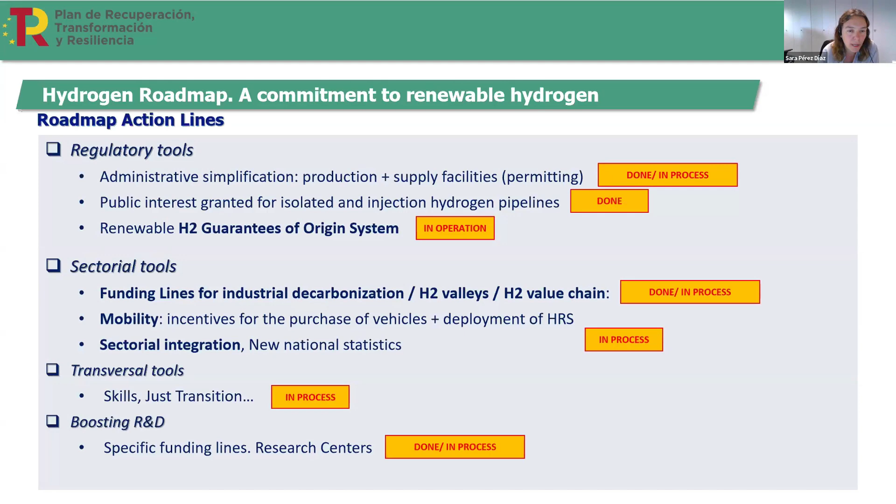In the next slide, I would like to give you some figures on the funding programs that we are managing at IDAE. All the funding instruments deployed by Spain for the hydrogen sector are under the umbrella of the Spanish Recovery, Transformation and Resilience Plan. Component 9 of this plan addresses the hydrogen sector, aiming to position Spain as a technological reference in the production and use of renewable hydrogen.

It is foreseen a budget of 1,555 million euros, structured along 4 lines of action, including line 1, innovative value chain projects, focused on strengthening innovation and research and increasing production capacity. At the first round, 250 million euros were granted in 2022 and 2023. And now in 2024, we are resolving a new call with a budget of 66.6 million euros.

Line 2, hydrogen valleys, to support big projects with hydrogen production and consumption. The idea is to create a hydrogen ecosystem where other projects or related activities could be developed around these big supported projects. Line 3, pioneer projects, focused on smaller projects up to 50 megawatts of electrolyzers, aiming to promote both production and consumption of renewable hydrogen in nearby locations. There was a first call in 2022 and a second call in 2023, with 300 million euros awarded in total.

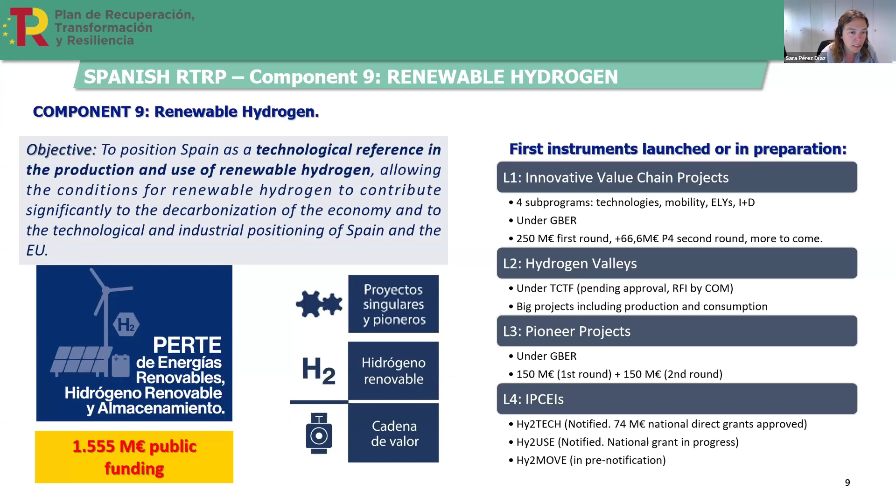So, next slide please. As I explained before, 300 million euros have already been allocated in this first program, Singular and Pioneering projects. The eligible actions are production, with the installation of electrolyzers but also with dedicated renewable energy plants; distribution, storage, conditioning and dispensing of renewable hydrogen, including hydrogen refueling stations; and consumption that, in line with the hydrogen roadmap, includes industrial uses, heavy mobility, and innovative stationary applications — what we call fuel cell applications, for example, for the decarbonization of ports or airports. So all these actions are eligible under this program.

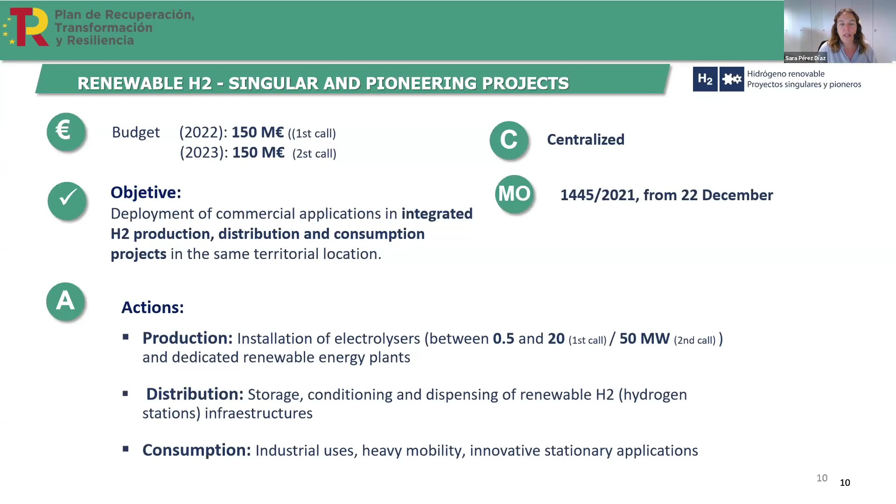In the next slide, you can see the renewable hydrogen value chain program. It had a budget of 250 million euros, and the objective is boosting the know-how and productive capacity through the development of technological advances in the hydrogen value chain. There are 4 programs included.

First, capabilities and technological advances in testing and manufacturing lines. Second, design, demonstration, and validation of new hydrogen-powered vehicles. The third line is large-scale electrolyzer demonstrators. And the fourth, basic and fundamental research challenges, innovative pilot projects, and training.

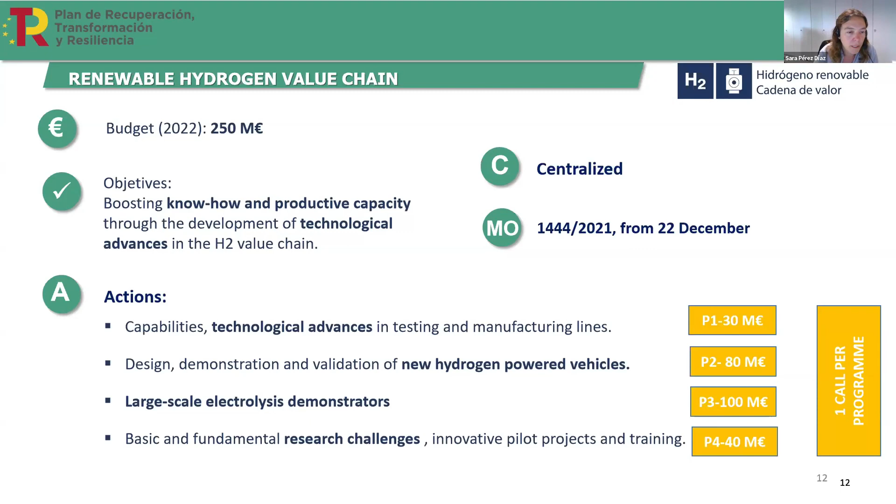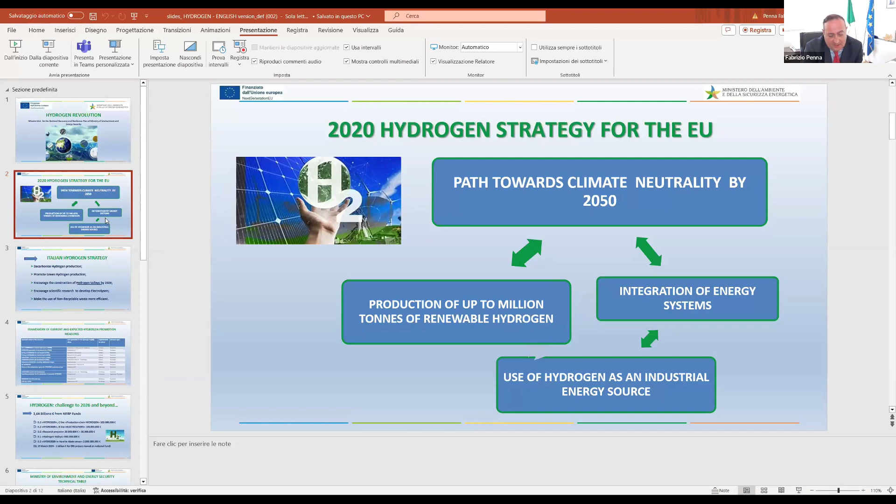Across the world, our life changes and individuals' opportunities to improve their quality of life are being threatened by conflicts and climate change. Supporting the development of technologies and the perception that they can mitigate or solve the current problems must become a top priority. Hydrogen is one such technology.

Recently, the EU has embarked on the important mission to decarbonize its economy and develop a sustainable emission-free model of society. With the Green Deal started after the COVID-19 pandemic and strengthened after Russia's invasion of Ukraine, the European Union has produced the tools that can shape a climate-friendly future. One of these tools is the National Recovery and Resilience Plan, with the addition of the REPowerEU chapter.

In this context, it's important to underline that the EU is not alone. In the world, many countries are striving to be champions of decarbonization. While their adopted timelines are longer than ours, we should not doubt their determination to achieve their goals. We need to bear in mind that global competition, and even our own European ambition to achieve climate neutrality by 2050, is closer than we think. There is only one generation to go before 2050.

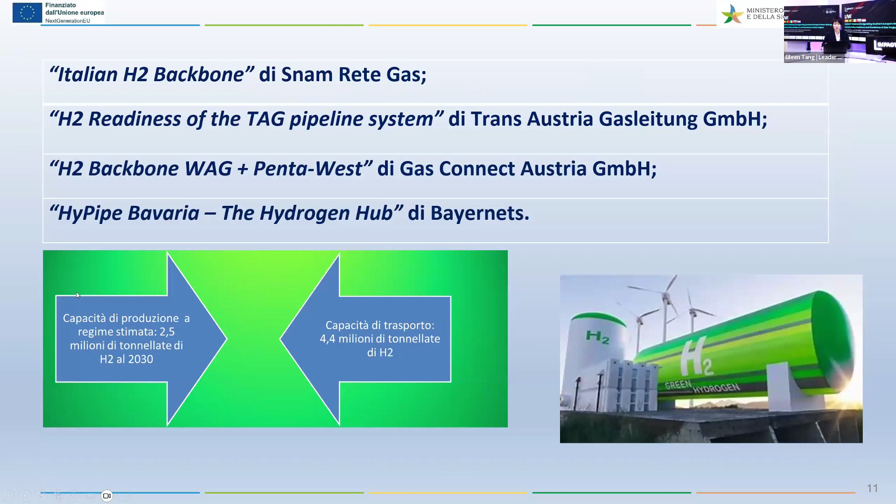And here we've got some questions from our audience. The first one is, what advantages does Italy possess in terms of green hydrogen policies or market in comparison to other countries in Southern Europe?

Thank you. As we say today, Italy strongly believes in the development of green hydrogen. Now green hydrogen is very expensive. We have different lines of investment. We have institutions open to companies from all companies of the world that want to invest in Italy. We have a plan to develop applied research.

And last, do you know that geographically we are a hub on the Mediterranean Sea, and we are, and we want to be, a logistical gateway to the African continent.

I think with a well-structured plan, like you stated, it's exciting to anticipate what's going to happen next in this market. Thank you so much again for joining us.

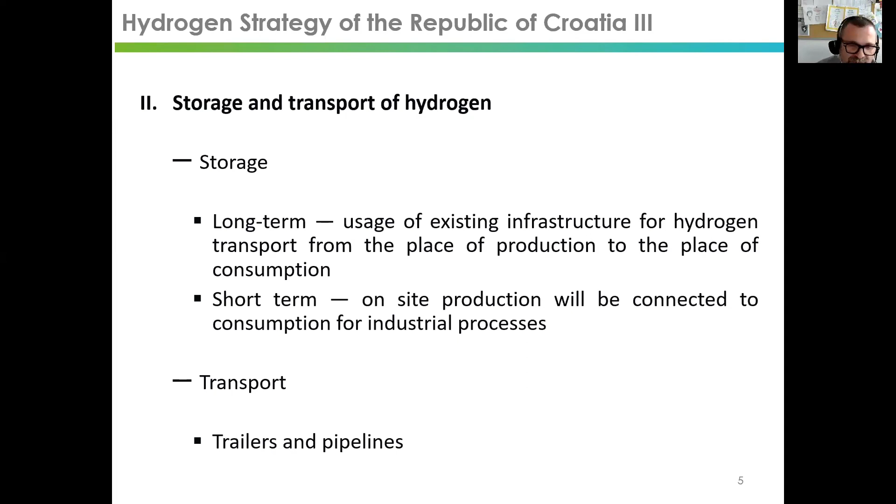And that hydrogen will be transported by trailers or by the pipelines that will be built in Croatia. Regarding the use of hydrogen, we also have potential projects.

The most matured project is probably in the transport sector, and we want to see hydrogen vehicles, especially heavy-duty vehicles, and especially city transport vehicles propelled by hydrogen. But we also have potential to use hydrogen in industrial processes, especially in hard-to-abate industries like glass and brick industry, but also as a raw material in the petrochemical industry and refineries. And we see hydrogen as a potential energy storage and a tool for electricity system stabilization.

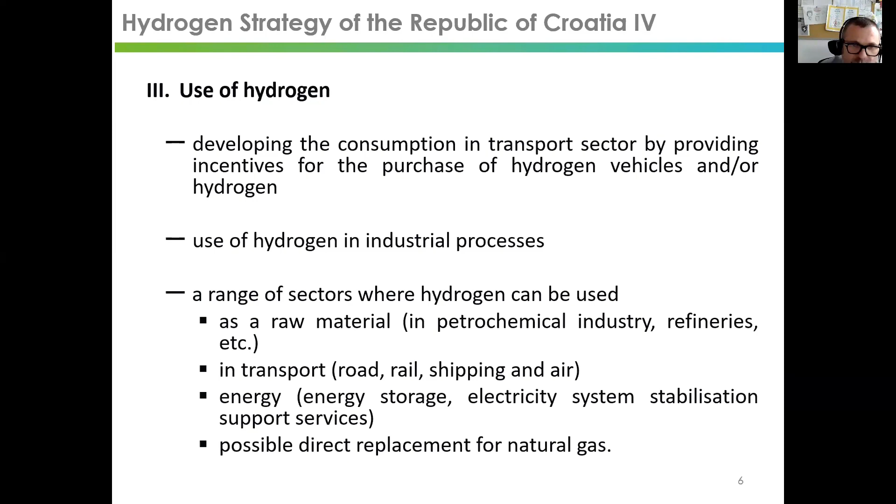As I said, the transport sector in Croatia is mostly mature, so we have a sector with high CO2 emissions, and it's shown that in the last few years the emissions in the transport sector in Croatia are growing. So we need to do something. We see the possibility to boost hydrogen in public urban transport, and maybe potentially also in the waste sector and other activities in the urban area. It will reduce CO2 emissions, but also noise emissions, so it's a win-win situation regarding urban transport.

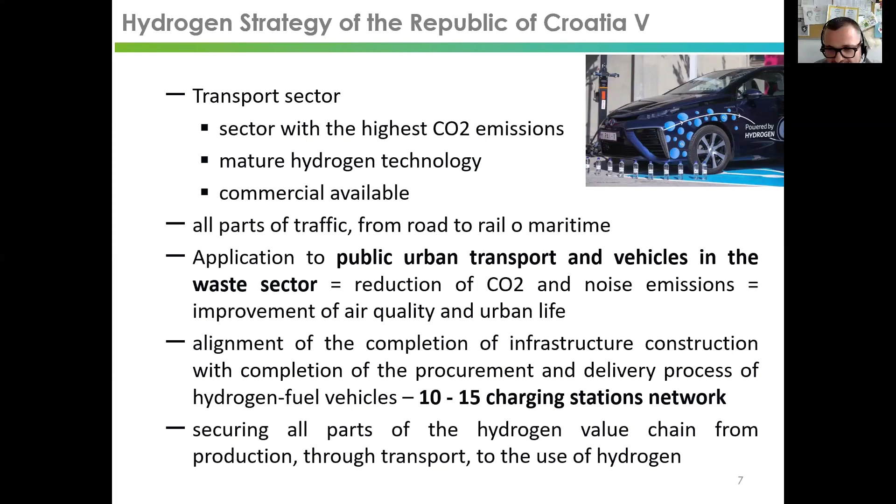To do that, we need to boost the development of infrastructure for the usage of hydrogen in the transport sector. Our goal is to have 10 to 15 hydrogen refueling stations in the network by 2026, 2028, let's say - 10 will be by 2026. We also need to secure all other parts of the hydrogen value chain: production, distribution, same as these refueling stations.

Another topic extremely important in Croatia, highlighted in the hydrogen strategy, is education, research and development. We need to develop new educational programs. We also need to develop the concept of lifelong learning for the usage of hydrogen, but we also need to raise awareness regarding the implementation of new hydrogen technologies in all sectors. We also want to connect innovative products and services to ensure commercialization and wider deployment of hydrogen technologies. We see potential in Croatian universities to boost this educational program, to boost lifelong learning, but also to boost research activities and connection with the Croatian economy.

One important project to highlight is the North Adriatic Hydrogen Valley. We put in the Croatian hydrogen strategy the importance of regional cooperation, and this is a good example of that, because North Adriatic Hydrogen Valley is a project that involves Slovenia, Croatia, and the Italian Autonomous Region Friuli Venezia Giulia. It's a transnational project dedicated to the development of hydrogen economies in Slovenia, Croatia, and Friuli Venezia Giulia. It will also coordinate international activities important to boost the hydrogen economy within the EU.

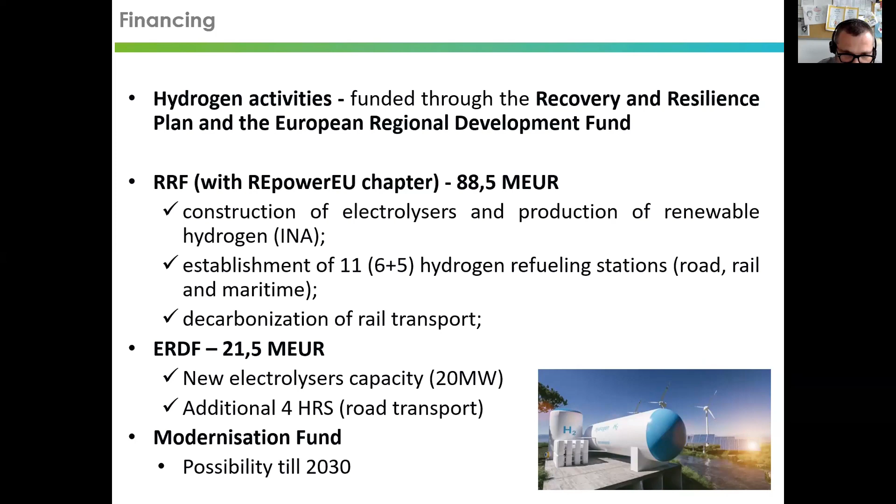We also have ERDF allocation of 21.5 million euros devoted to new electrolyzer capacities and additional four hydrogen refueling stations for road transport. We also have the possibility, using the modernization fund, to finance some projects until 2030. So to conclude, Croatia is fully committed to the green transition, and hydrogen will play an important role in reducing CO2 emissions. We also think we need to boost research, development, and innovation across the hydrogen value chain to prove hydrogen will be an important energy carrier that could be produced and used in the EU.

Thank you so much for sharing Croatia's journey. Now let's check out some questions. One of our audience asked about the definition of low carbon hydrogen. Are there any criteria for what low carbon hydrogen means? Do you differentiate it from green hydrogen? Also, regarding the transport of hydrogen you mentioned in your slides, are there any existing plans or solutions for the infrastructure required for green hydrogen distribution?

Well, the EU promotes renewable hydrogen, and that is important, and mostly in Croatia most of the hydrogen will be renewable. But as I mentioned, we have some potential still in the research and development phase, such as pyrolysis from sludge and waste, as potential low carbon hydrogen that can be used to boost the hydrogen economy.

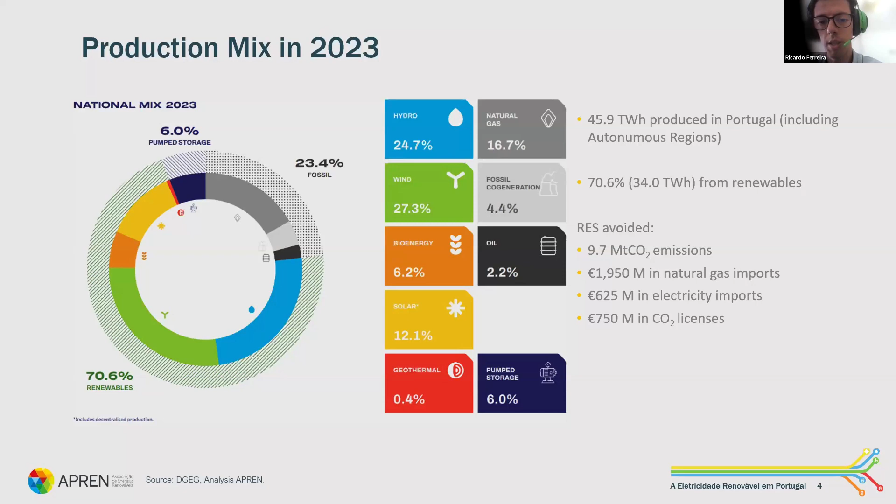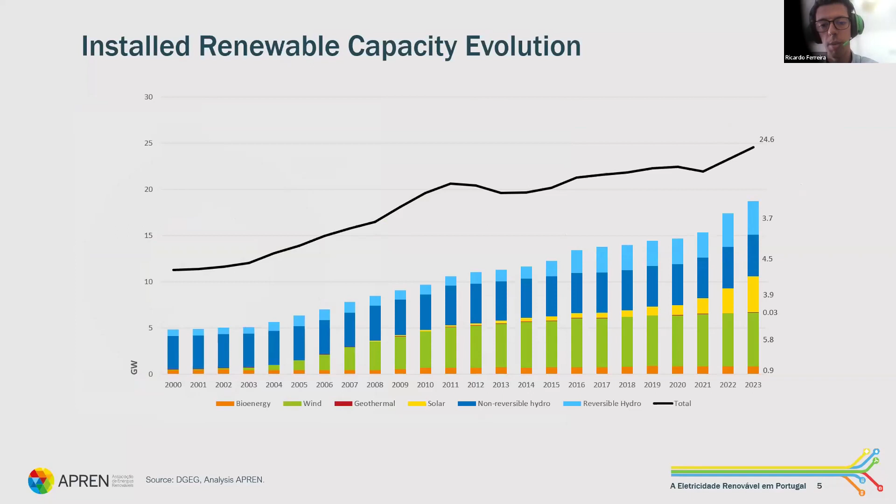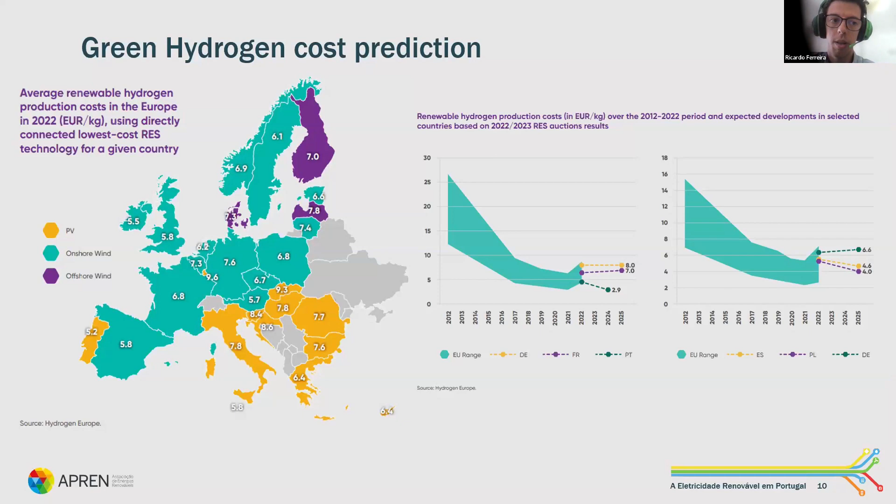The question for you is, what is the most significant opportunity for Portuguese investors to accelerate the growth of the green hydrogen economy?

With Portugal's renewable energy production potential associated with our targets and measures to accomplish them, we will have, as I presented, one of the lowest LCOH by 2030, and this is associated with low electricity prices due to the development of the sector. So Portugal has not only the resource potential, but also the ambition and the regulatory framework to accomplish the targets defined. Thank you.

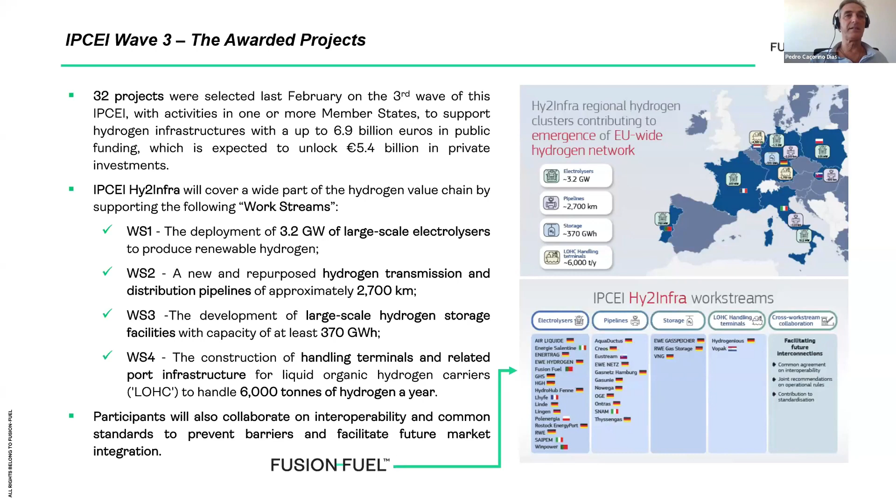Our project, developed by Fusion Fuel, will be developed in Sines. It will be called Sines Green Hydrogen Valley, and will consist of the installation of 630 megawatts of green hydrogen production. This project will represent 11.5% of the Portuguese national hydrogen strategy, which aims to install, as Ferreira was saying in the last presentation, 5.5 gigawatts by 2030. This project will be able to produce 62,000 tons of green hydrogen.

It will avoid 600,000 tons of CO2 per year, about 13 million tons of CO2 along the lifetime of the project. This avoidance considers the direct substitution of gray hydrogen produced from steam methane reforming of natural gas. The green hydrogen produced will be mainly targeted for the port of Rotterdam in the Netherlands and the decarbonization of several local industries in Portugal. 40% of all the green hydrogen produced will be converted into ammonia and exported to Rotterdam, creating a kind of pendular movement and total integration between the two.

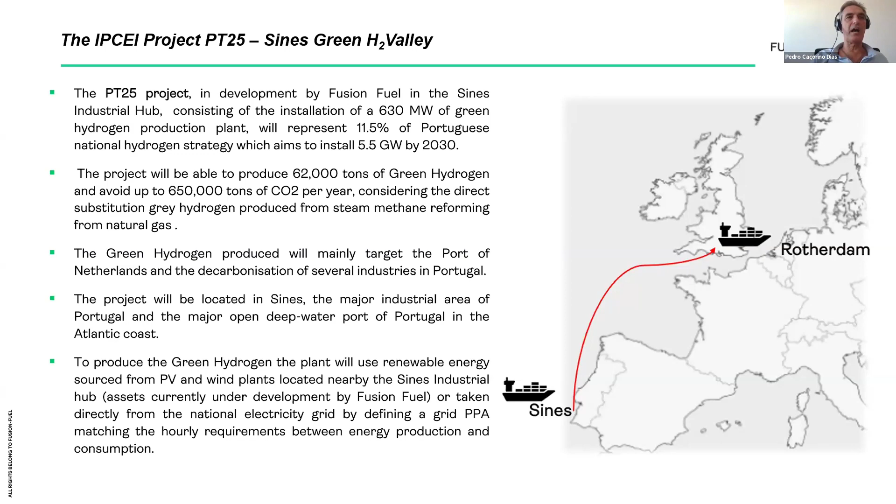It will be self-consumption according to the Portuguese legislation, and we will also request to achieve a higher load factor, the higher use in the days and hours where there is no sun or no wind, to use the grid. Because of the legislation, we need to do that to be considered green, to match the hourly requirements between energy production and energy consumption.

I don't know what you know about Fusion Fuel, it's not the most important, we're talking about the project, but Fusion Fuel is a pure play hydrogen solutions company focused on projects in Europe and North America. We went public in late 2020.

We have two manufacturing facilities in Lisbon, mainly one in Benavente, with a targeted maximum capacity of production of 500 megawatts per year, and we produce a European electrolyzer, which is kind of revolutionary, which is this one.

This container of 40 feet has 2 megawatts, but is composed of sets of these cabinets here that you see, connected in series, and each of these cabinets contains 36 of these very small PEM electrolyzers. So we can make extremely big power plant hydrogen plants, but we can make them also extremely small, so adapt exactly to the power that we have.

With this kind of flexibility and modularity, we can move our electrolyzers directly to the power and not the opposite, and we can very easily adapt to projects for self-consumption. So this project will be an opportunity not only for the IPCEI to connect the port of Sines and the port of Rotterdam, but will also be a possibility to develop and demonstrate this flexibility of this European technology produced in Portugal.

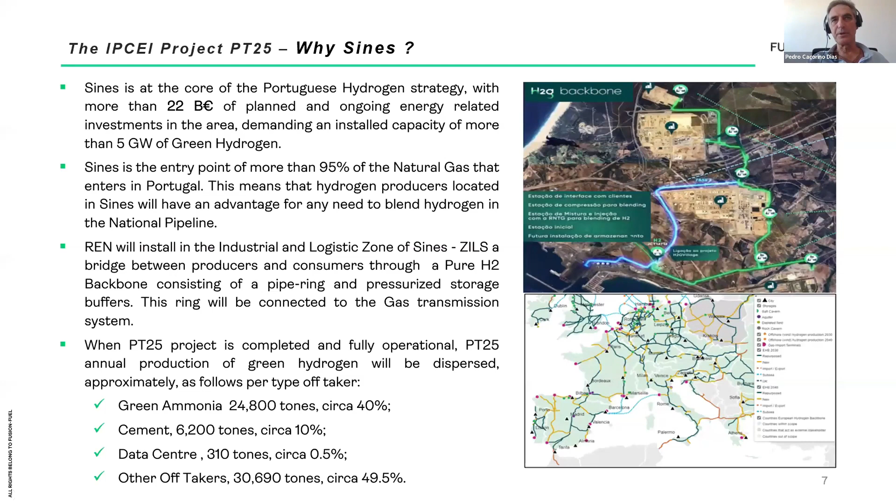0.5% for the data center that will be installed also in Sines, and for other list of takers, which is Repsol, Green Steel, and so on, Indorama—all the local companies will offtake the remaining 50%. So all the hydrogen used internally will be produced by the local producers that install themselves internally.

To finish, these IPCEI projects give extraordinary importance to what they call the project impacts and the spillover effects, a full list we have presented, but I will underline the following: decarbonization of hard-to-abate sectors, which are extremely hard to abate and extremely strong responsible for the emissions, like ammonia, cement, steel production, and backup power, which is an end use currently dominated by natural gas and diesel engines.

This project will also assist Europe in diversifying its energy sources, reducing European dependency on Russian gas, as well as US, Canada, and African gas.

Also, the installation of this capacity, which is huge, 630 megawatts of green hydrogen, is important at least for Portugal, but even for Europe. This is a strong contribution for the goal of 40 gigawatts of green hydrogen installed capacity by 2030.

And now to finalize, this IPCEI project will strongly uplift large scale production of our EVO technology that, for the reasons I've demonstrated, is extremely flexible and modular, able to be used for extremely small and extremely big installations. So it will contribute to the reinforcement of the European technology value chain and diversifying risks related to technology.

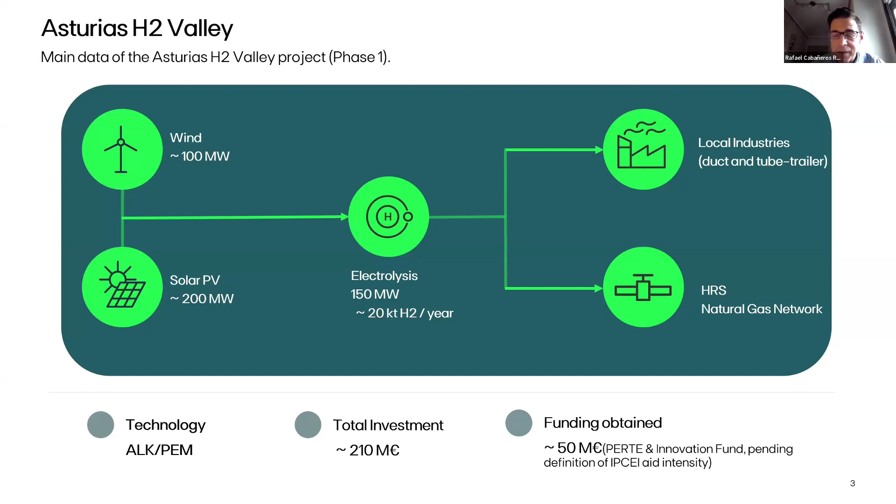This is the abstract of the different grants we have received. I've commented on the 20 megawatt project which has received 15 million euros from PERTE 1. For the second sub-phase of 30 megawatts, under PERTE cadena de valor, we have received 15 million euros. For the IPCEI, as I commented recently, we don't know what quantity we will receive. I hope this knowledge will be transmitted as soon as possible. Finally, for the innovation fund, we have received 18 million euros. This is the total for phase one of the project: 150 megawatts, 48 million euros, plus the quantity of the IPCEI grant.

The location of the Asturias Valley is near Gijón, in the north of Spain, in Asturias, and very close to a lot of industrial points, natural gas consumers and other industries with needs of decarbonization. This is near Avilés and Oviedo and similar. In fact, we have another project near Gijón, near Oviedo, the H2 project of Soto, and the idea is to join these two projects with an internal hydrogen pipe in order to get 1 gigawatt location.

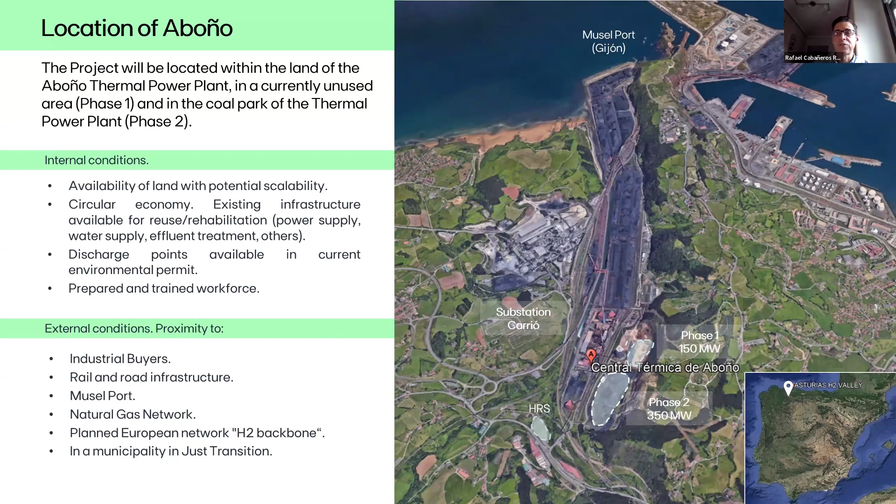With more detail, this is the area for phase one. Phase one, as I commented, has received all the grants and has passed the permitting. It is in this area at the right of the plant, in the northern part of the site, with 150 megawatts of hydrogen. This site is totally available, with no problem with soils or other contaminants. This is ready to build, with a COD expectation of 2026, the middle of 2026, depending finally on the date for the grant of trade. Phase two adds 350 megawatts, with COD expected more or less in 2030, depending on the needs of the industrial valleys in the surroundings of the plant.

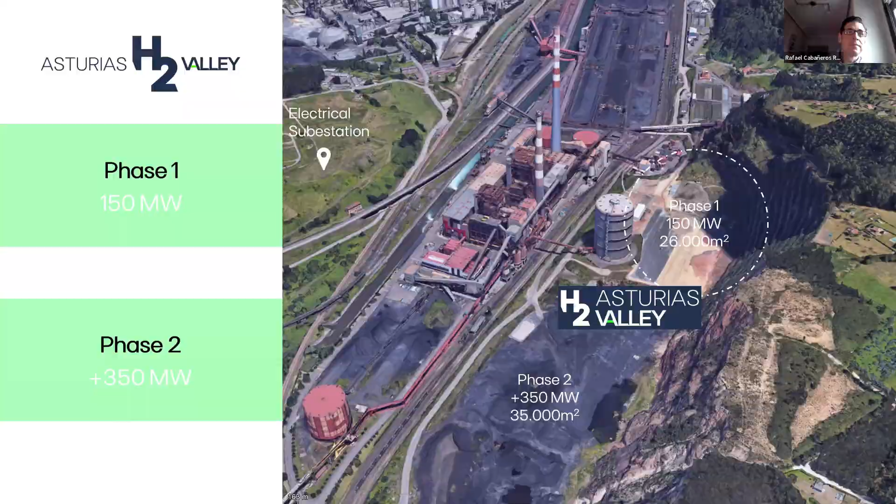This is a very simple abstract of this comment. The start of operation of the plant of 150 megawatts will be in 2026, and the other phase for Aboño 2 will be between 2027 and 2030. And the joint with Soto in order to get the IPCEI project with 1 gigawatt total in Asturias will be in 2030.

With different stages of the development, as I commented: the environmental permitting has been paid at this moment, the electrical connection is secured and paid, the water is available, and for the other public support, the project of common interest for both projects is very important.

The main project advantage is that both projects are located in a just transition area. We have developed a circular economy with reuse of the land, the buildings, the infrastructure, and the personnel near the Valle industrials.

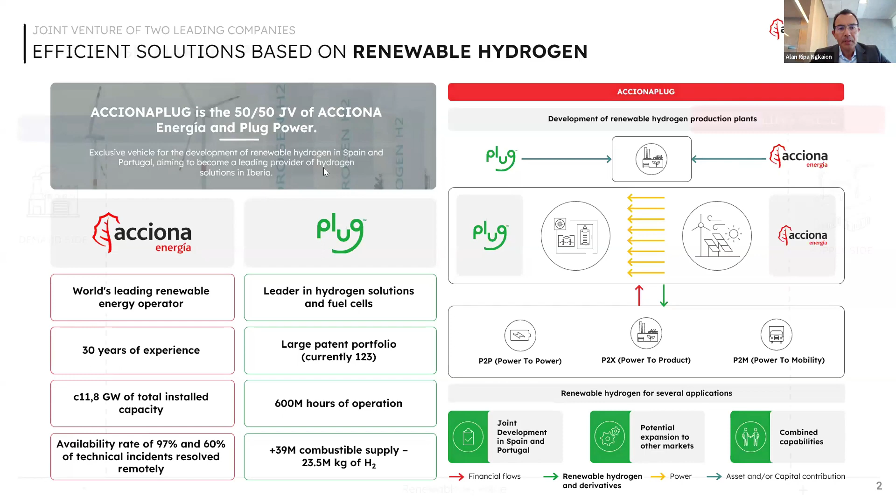I would like to spend some minutes on what I think is the main challenge, which I would call the market transformation. I'm sure some of my colleagues have also made reference to this, but just to recall some ideas: in my opinion, especially in the Iberian market, the main challenge is to reduce the gap between what the demand is willing to pay and the cost of producing green hydrogen. As I mentioned, our DNA is focused on reducing cost to the maximum possible, to try to achieve a competitive price for local demand.

The purchase price on our side, from what we know, is defined first by the current source of energy, whether you're replacing natural gas, diesel, gasoline, or grey hydrogen. In addition, there's the CO2 emission rights cost that industry now faces, and there's additional value, for example in mobility applications where Plug Power has a special solution for forklifts, replacing batteries with fuel cells. That creates certain value in terms of time and space, especially for companies focused on logistics. Those are the main drivers from the purchase price side.

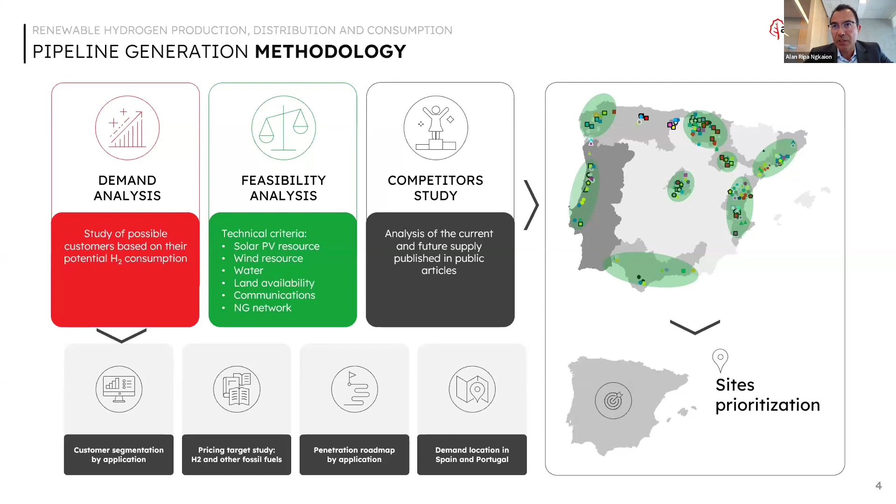Now, we believe that in order to reduce the cost of production as much as possible, our hydrogen plants should always have a dedicated renewable energy project—if possible, a hybrid project, a mix of wind and solar—with a dedicated line to provide self-consumption kilowatt hours. But of course, the electrolyzer should also be connected to the grid in order to get electricity for those hours when we don't have sun and wind.

We offer two types of projects: what we call a centralized hydrogen generation project, where we try to maximize the amount of renewable energy available at that location, to get as few kilowatt hours as possible from the grid, avoiding tolls and taxes on the kilowatt hour.

And on the other side, we also have what we call on-site or distributed generation, where we do a tailor-made project for a certain off-taker that wants to consume green hydrogen. We try to build the project very close to, or beside, the off-taker's plants, but in many cases, since those off-takers are on industrial land, there isn't enough renewable energy resource or land available for the renewable energy solution.

We can also provide a mixed solution, doing an on-site project for an off-taker, and if we don't reach the amount of green hydrogen to be provided from the on-site project, we can also provide additional supply from the centralized project.

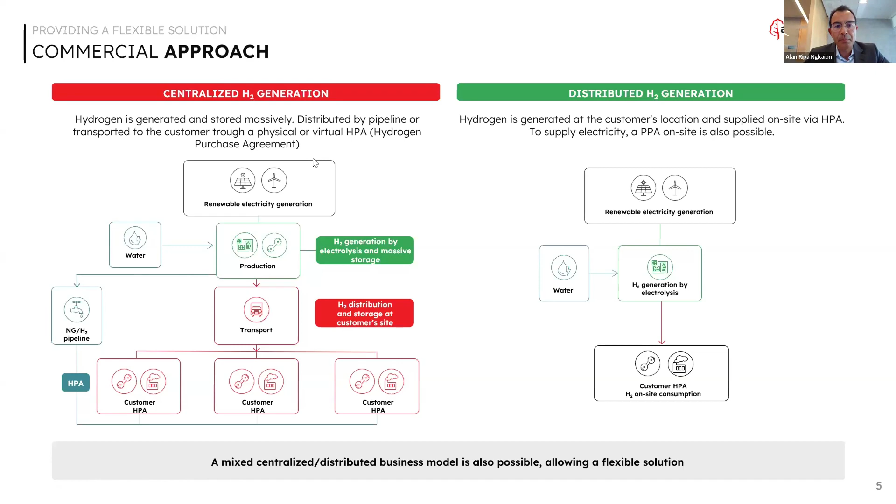We based our development decisions on the main drivers for the LCOH: firstly, the CAPEX, the development expenses, and the OPEX. And therefore, I hope you now understand why we have chosen the region of Navarra in northern Spain to start our first development in green hydrogen.

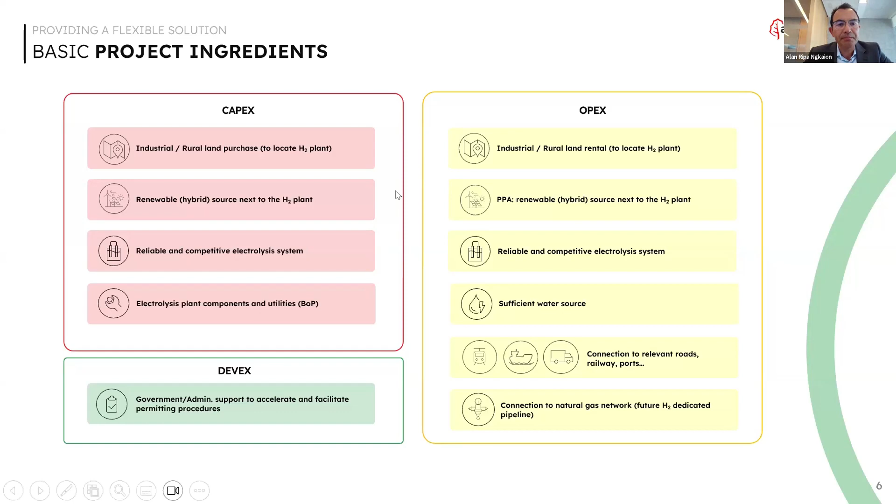This is a 25 megawatt electrolyzer capacity, expandable and scalable to another 25 megawatts. The aim of this project was initially to produce hydrogen as soon as possible in the most competitive way.

We chose this location because Acciona Energía already has a biomass plant in operation since 2002. Inside the industrial plot for the biomass plant, there were 4 hectares available to install a green hydrogen production plant. We also had water available, as the biomass plant already has a water capture system and wastewater treatment, so we could use that infrastructure for the hydrogen plant.

Acciona Energía also has several wind farms in operation within a radius of 5 to 10 kilometers, so we already knew the wind resource and how much wind we could get to power the green hydrogen plant. We also have very close access to the grid, with a substation in the industrial area less than 1 kilometer from the biomass plant.

We also have access to the natural gas network in case we want to blend with natural gas, plus road access and proximity to end users, mainly off-takers who can replace natural gas with green hydrogen. Based on the presence of Acciona Energía, due to the biomass plant and wind farms, there's a strong relationship with the regional and municipal government.

In the case of the Navarra project, this will provide us about 50% of the number of hours of full capacity just from the dedicated renewable energy plant. Of course, as I mentioned, the electrolyzer will be connected to the grid.

We have Plug Power electrolyzers, 5 units of 5 megawatt electrolysis each, and the hydrogen will have different types of transportation through tube trailers. We also have the possibility to connect to the natural gas pipe to do blending.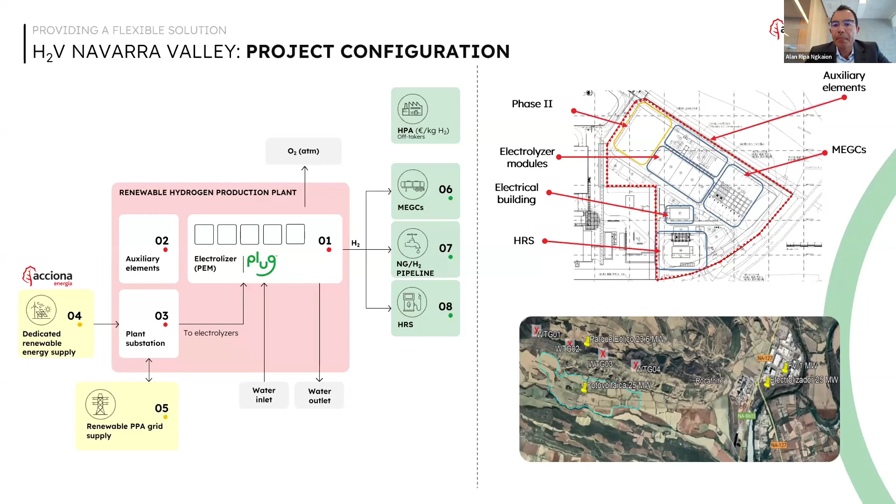And that's all in relation to my presentation of the Navarra project. Thank you very much. Thank you so much, Mr. Ripa, for your enlightening and detailed speech about your remarkable project.

And let's check some questions for you. I think we're all curious about what are the subsequent steps involved in developing the targets for Acciona Plug in the Valle H2V Navarra project? And also, what do you think are the key challenges and problems faced during the implementation of hydrogen projects?

Well, the next steps, to answer your first question, will be to get the environmental permit from the regional authority, which is on the way. We expect to have that in 1 or 2 months. We just got the last report from one of the departments yesterday, which was the last element of the puzzle to get the environmental permit.

The next step will be to get the construction license from the town hall of the municipality. For that, they need the industrial permit, which we already have, and the environmental permit, which we hope to get in 1 or 2 months' time. With those two permits, the town hall will give us the construction license.

And the third item we need to go through is, of course, the final investment decision. For that, we will have to build a demand case for the green hydrogen. We have several off-takers in the surroundings. One of them is, I would say, within a radius of 10 to 12 kilometers, so the solution to transport that hydrogen will be with a specific hydrogen tube or pipe.